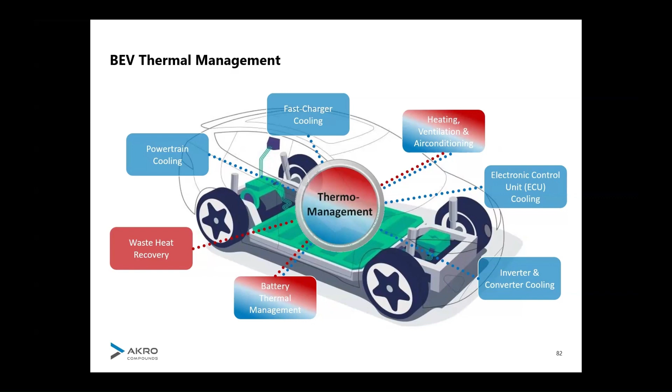You must control the temperature in your fast charging unit. You must control so many different converters, inverters, and on top of that you also have heating, ventilation, and air conditioning. So you see immediately that there are many jobs to be done.

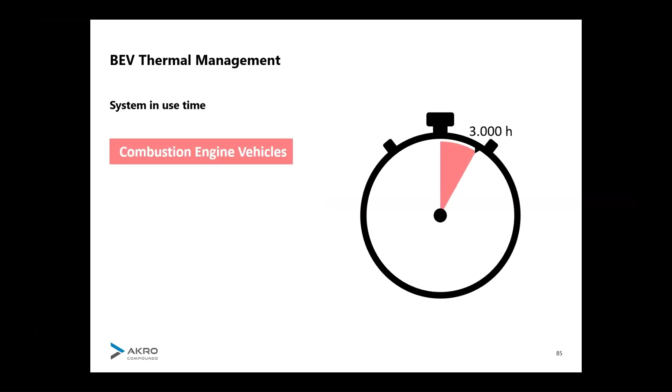The system in-use time in a battery electric vehicle is much different from combustion. In combustion engines, we test for 3,000 hours. Now if you look into battery electric vehicles, 15,000 would be nice, they go even to 30,000, which is already 10 times the in-use time compared to a combustion engine. And we already have customers asking for even more, 45,000 hours, 15 times the time of a combustion engine. So that makes it necessary that you use really the right material.

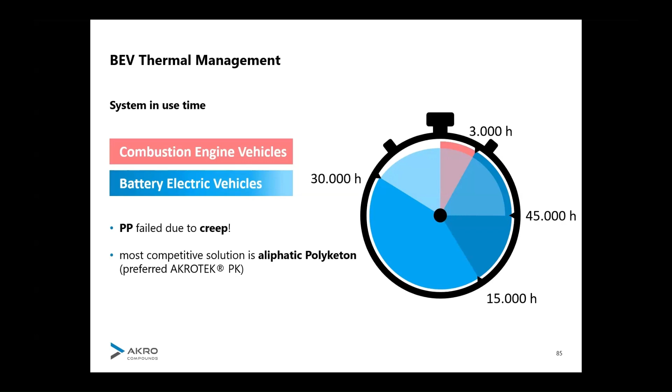Some say polypropylene creeps a lot, and there are reinforced polypropylene types, but after such a long time there is creep, that's just the nature of the polymer. It's hot oil, so therefore we see more expensive grades like PPA or PPS being used.

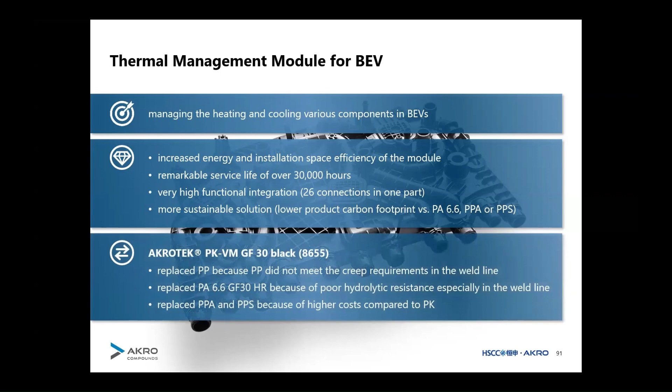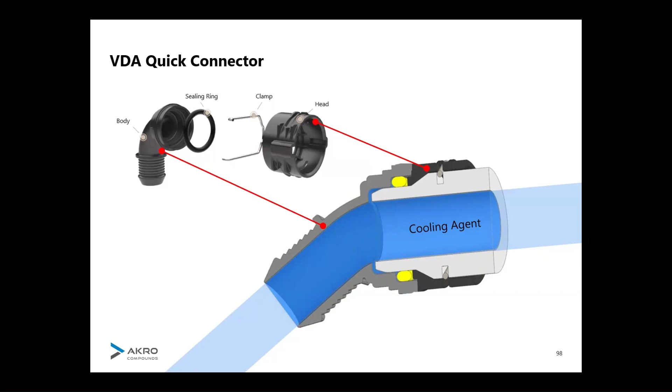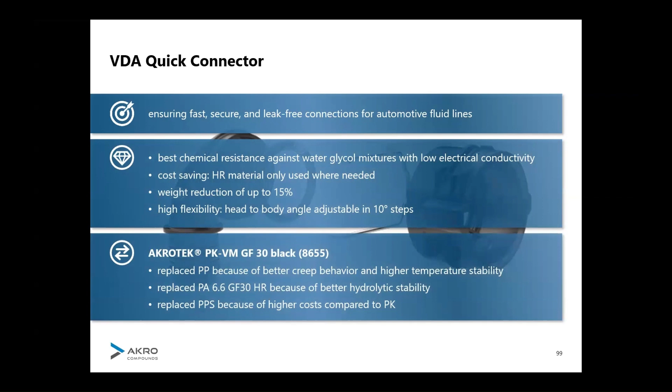We have combined it with a sealing ring and with a clamp. In the end, you can really focus on mechanics and toughness in this area, on price, and also with our PK VM GF30 Black, many applications in all different areas.

The reasons why polyketone is used have already been mentioned. In that specific case, it's heavy-duty caster wheels. Caster wheels have been made with nylon 6 for decades, and it's the standard material widely used. We had a customer, a family-owned, smaller privately held business acting as an OEM. They do their own development, manufacturing, and selling, and they sell globally. They are one of the market leaders, and they had an issue with their heavy-duty caster wheels with nylon 6. So we had a chance to test polyketone against it in the same tool.

We supported them for several days with molding trials, and we could speed up the cycle time by 50%, which is a huge step, and I will explain later a bit why this is possible.

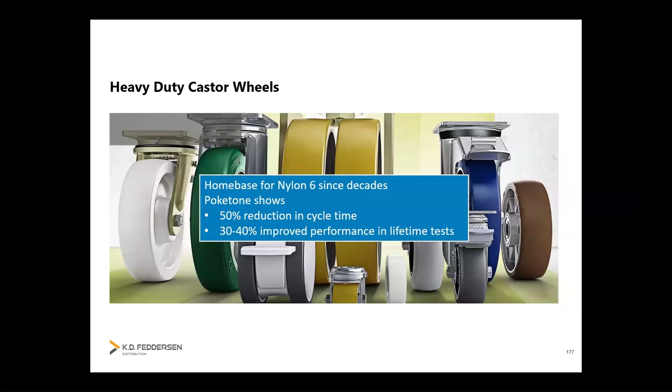So now they are stepping in for that heavy-duty caster wheel application and replacing it with polyketone, and this application will be multiplied.

We've already seen it, that is some kind of number one application in the automotive industry - high voltage connectors for e-mobility. Typically the materials used are nylon-based, so nylon 6,6, some PBT, also some PPA materials are used, as well as polyketone. Standard material is glass fiber 30 with a flame retardant system that enables reaching V0, plus orange color, which is needed to make it optically clear that this is a high voltage application.

Typically when material ages over time with heat, parts break due to brittleness. And here you have a huge safety margin in terms of long-term application as well as for all the clips - twice as much as every other material.

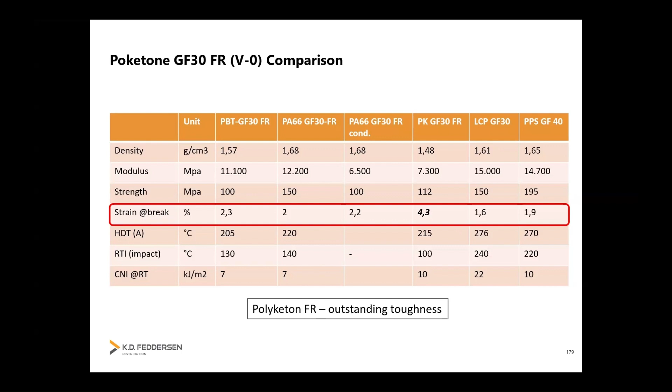For fiber trays, this is a big topic in Germany as we're building our glass fiber network for internet to get a broader range. The part we're talking about is this flap here. Many are put into that device, and the whole network is then used to distribute that within buildings or communities, so it's a highly complex application.

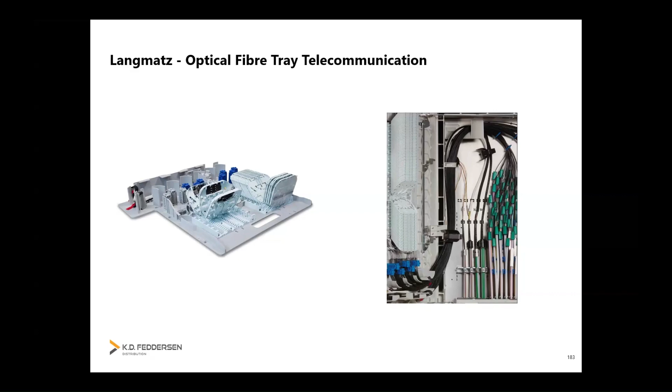In total, the whole assembly uses an unfilled polyketone with flame retardancy rating V0. It's a custom color, mass colored, a special white for that customer. And the combination is PFAS-free and halogen-free.

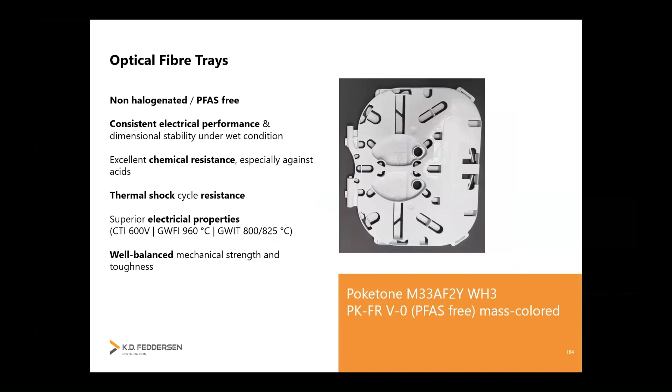The customer was previously using predominantly ABS material for this fiber tray, but with the new requirements for that application, ABS didn't make it. So we had a chance to discuss with him and introduce polyketone, which was not known to him. We supported the molding trials and could speed up the cycle time by 50%. This is a thin wall part, just 1 millimeter.

And the caster wheels, for example, were thick wall parts where we're talking about cycle times of minutes, since the parts are several centimeters thick.

For the customer, it was the combination of mechanical performance, with a lot of toughness still left over. So with that combination, unfilled, you have 40% elongation at break with the material still rated V0. That was one point for the material.

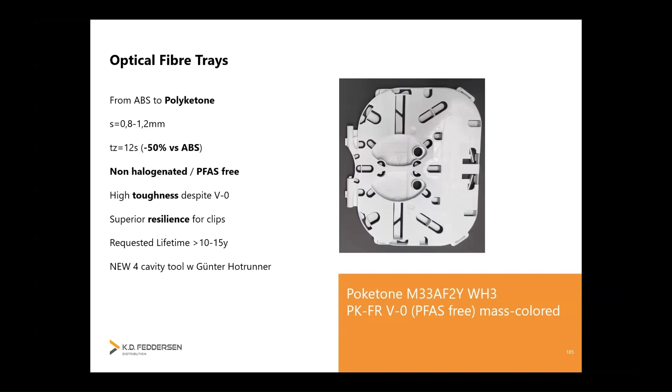They've done their extensive testing, and now they are scaling up and building a new four-cavity tool, to my knowledge. What I heard, they should be in contact with you. As far as I heard, they're switching to a full hot runner system.

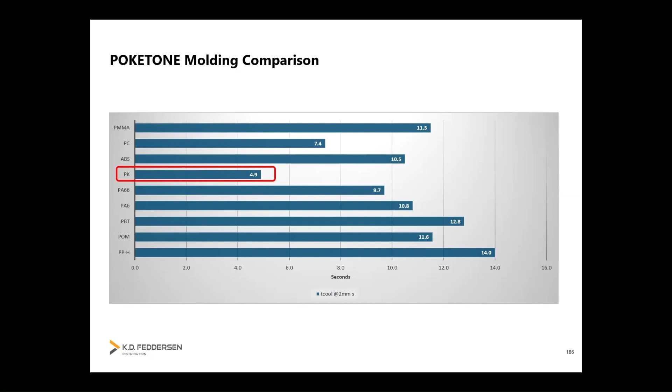There are two reasons for that. One is the thermal aspect, that the heat transfer is quite quick. The other is that the speed of crystallization of the material is exceptionally fast. That makes it a really super fast cycling material, which adds, besides the performance and properties of the material, a big step in economical benefits the customer can get. But this needs to be supported in the molding trials to really squeeze out what's possible. We've proven several times that we can speed up the cycle time.

A typical module made of POM would last 2 to 3 months, with cut resistance and drop impact potentially causing replacement. Now that peracetic acid was being used, some of these modules were breaking in as little as 2 weeks, increasing manufacturing cost, downtime, and creating a new concern with polymer fragments mixing with the meat because they were breaking so regularly. This is where we got involved with our customer.

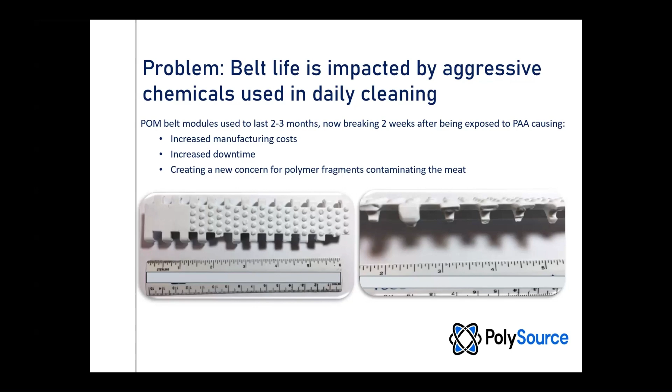They brought the problem to us and said we need some help. Through the design funnel we started looking at it, really at the chemistry behind the problem they brought to us with peracetic acid. We can see how it readily breaks down the carbon-oxygen bonds in POM, but has no effect on POK.

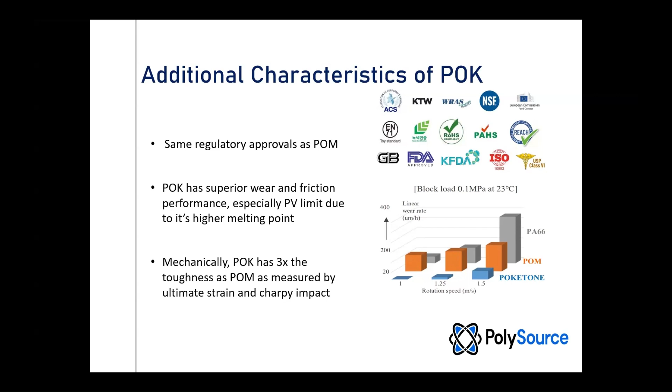Continuing through the design funnel, POK has great regulatory approvals, so we didn't have a concern there. It meets all the FDA and other countries' food contact requirements. We did some studies to show that POK has superior wear and friction performance, and as you can see here, we definitely improved the wear resistance at different rotational speeds that the customer would need. Mechanically, as mentioned earlier, POK has 3 times the toughness of POM, so it really looked to be a good candidate for next steps.

So we did just that. We went to our customer and sampled with them. Parts came out looking great. Dimensional requirements such as pitch and length are very important as these fit together, and we were able to meet those without needing any mold modifications due to its similar shrink rate. And then, of course, the resistance to the sanitizer appeared to be good.

So it was good to move forward. The next logical step was to get this belt into production to see how it would perform. As mentioned, POM was lasting about 2 weeks, so we started calling around that time frame to see how it was going. Things were great—weeks turned into months. Finally, at the 9-month mark, the customer couldn't believe how well it was performing and decided to take it offline and replace it, just because they thought for sure it was going to break eventually. It did not.

We also had some unexpected benefits of polyketone. Cleaning happens every day, and with the POM, protein residue would stick to the belt. That led to a little bit more elbow grease needed to clean these belts, and as you can see, they were losing products.

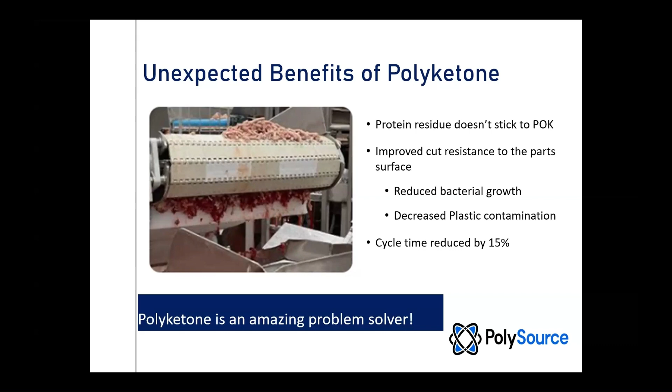The target is simple but critical: to ensure absolute rear side stability for safe enclosure design. The pass-fail conditions are strict: any hole, any burn-through, or any ignition on the rear side means failure. So let me show you the demonstration video of it.

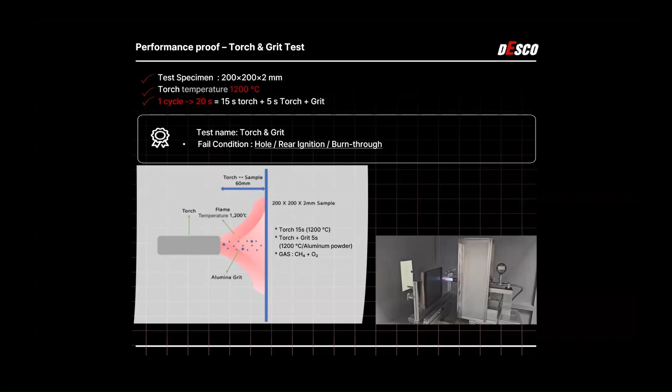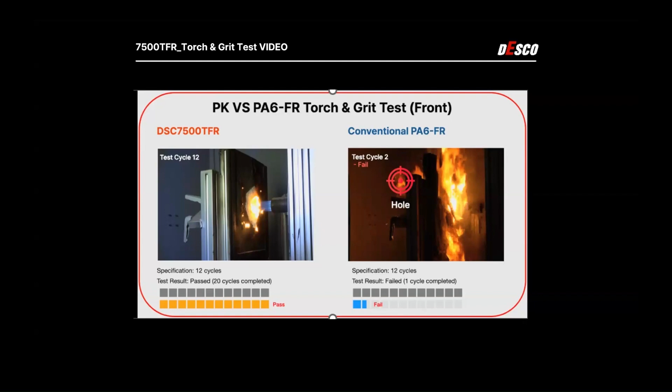Now I'm going to show you a video of the torch and grit test featuring our 7500 TFR grade. To give you a clear comparison, the video will show two materials side by side. On the left is our TFR grade, and on the right side is a standard flame retardant material, a polyamide 6 with 30% glass fiber rated to V0. Both specimens are 2 millimeter thick, tested at 1,200 degrees Celsius, with the flame 60 millimeter back between the specimens and the torch. Let's watch how it works.

Here is the demonstration video. I'm going to skip the introduction about our grade.

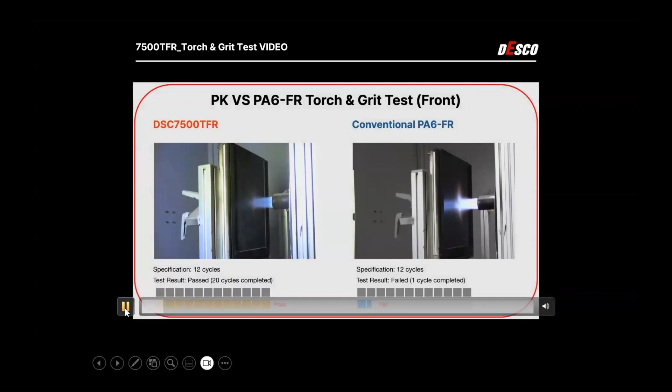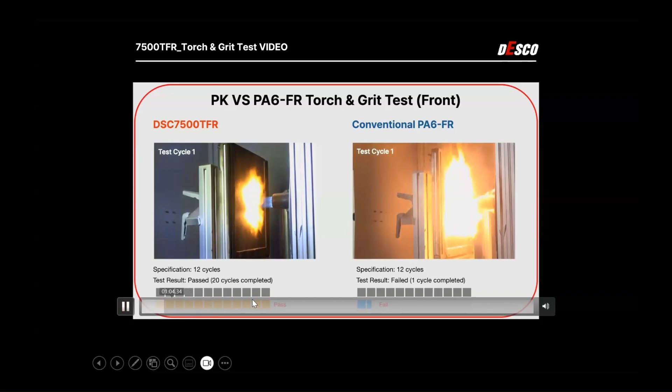Just to make sure, this is our TFR grade, and this is the nylon 6 flame retardant grade. Here is our specimen, 2 millimeter thick, with a distance of 60 millimeter from the torch. For 15 seconds there's only flame, and for 5 seconds there's flame and grit. That's one cycle, and let's see how long they endure this test. This is one cycle.

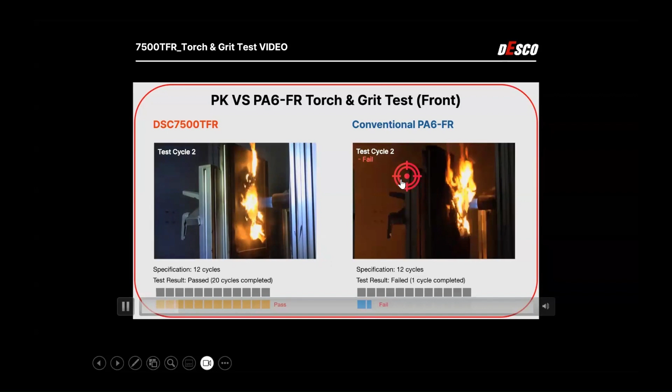After 15 seconds, there is aluminum grit applied. Now it's cycle 2, repeating the 15 seconds and 5 seconds section. As you can see, the nylon 6 flame retardant grade already had a hole during cycle 2, so we stopped it. But this is the polyketone grade, TFR grade.

Now it's cycle 3. Let me skip ahead to show how long it endured this test. So it's cycle 5, 6, 8, 9, 11, 13, 15, 17 — this is a kind of char layer of polyketone. Cycle 19 and 20 — even at cycle 20, there's no hole or flame on the backside.

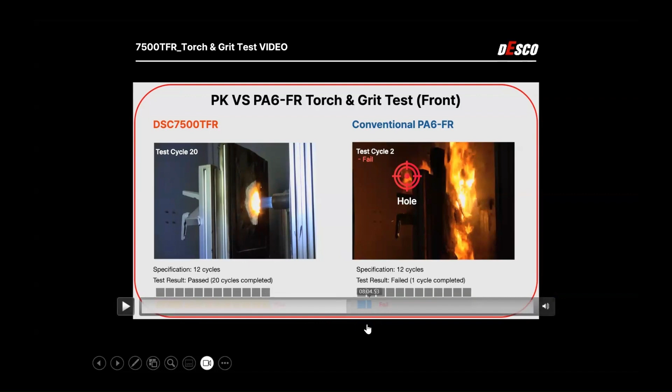Let me show you the backside of this specimen. Here is the backside of it. Yes, flame is over here, and here is the backside of the specimen.

This is during cycle 1 — no hole at all. Let me show you cycle 2 to show the hole here. Now it has a hole, with flame on the backside. That means this grade has failed — this is the polyketone TFR grade comparison.

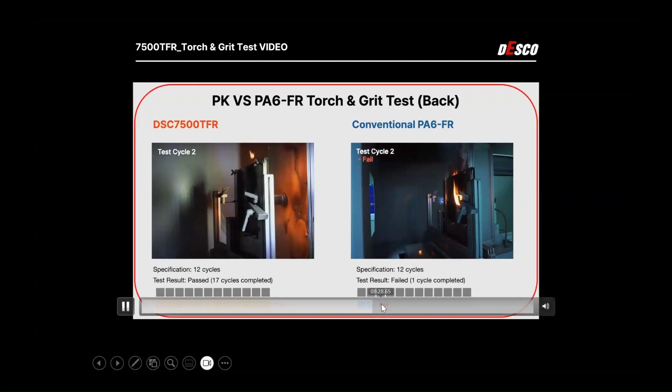Let me skip to cycle 4, 6, 8, 10, 13. There are still flames on the grit side, but no flame or core at all on the backside. Until cycle 20, there is no hole.

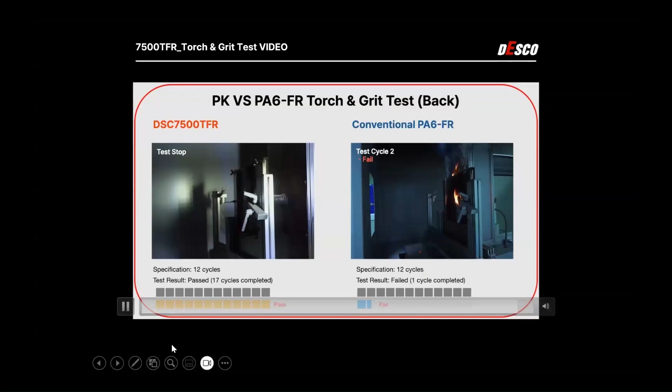Let me show you the result of the test. Can you switch to it? Yes.

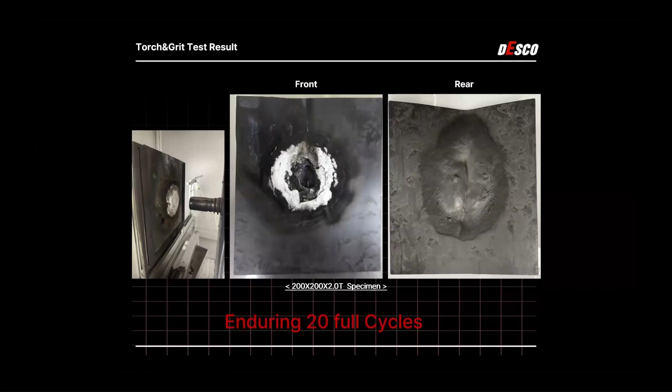This is the still image from our torch and grit evaluation. The specimen on the left is the front, polyketone. Then we are telling two stories.

One story is about engineering commodity resin, which is the PA6 material, versus super engineered plastic material. First, if the material has problems or big troubles, then we are a solution provider. And since super engineered plastic is sometimes too expensive with over-engineering factors, we give customers a reasonable price with moderate performance, so customers can optimize the engineering factors and reduce cost.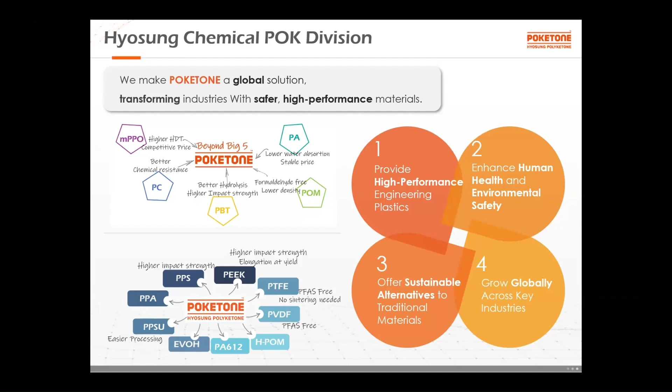What about polyketone? So first, polyketone density is 1.24, PBT 1.30, POM 1.41, nylon is 1.14. So its position is here.

Tensile strength, polyketone is around 58 to 60 megapascal. So something softer than POM. And elongation at yield, polyketone is more than 200%, very high.

Hardness looks soft, versus heat deflection temperature which is very similar with nylon 66, and toughness similar with polycarbonate. Polyketone is tough and high impact, competitive with engineering resins so much.

In the bottom table here, we can see two points: one is impact strength, and the other is changing properties of nylon. Polyketone as an unfilled base resin is 15 kilojoules per meter squared, versus nylon 4 to 5, PBT 5, POM 6. So it's 3 times higher as an unfilled base resin.

Nylon is a very good material, but it absorbs water and changes a lot. So as dry, 17, 19, but after wet, 360, 370. But polyketone is 200%, always stable.

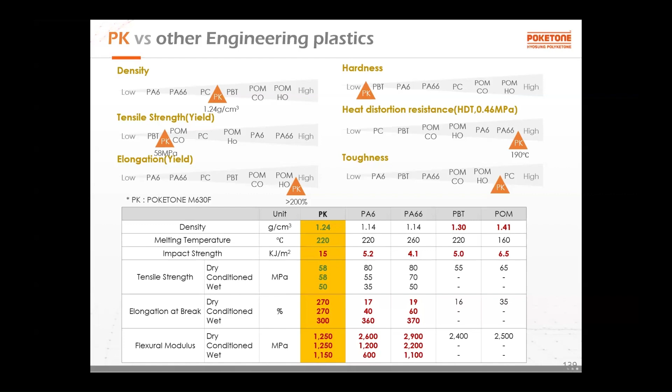And flexural modulus, unfilled base resin around 1250 megapascal. Nylon starts at 2600 in dry, but drops in wet to 600. Very much change. That's why we are telling you polyketone is here, and if you have a problem, then we can give you the solution.

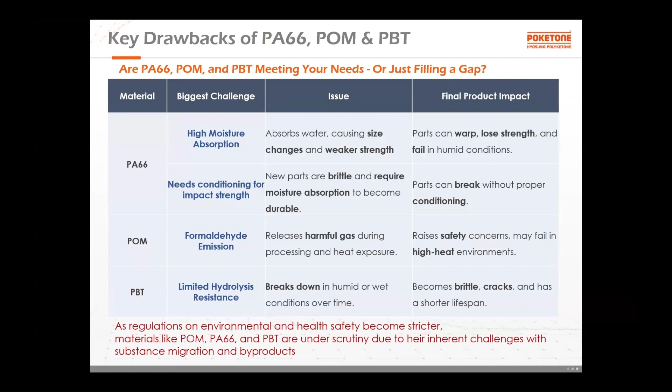So as a summary, nylon has high moisture absorption and needs conditioning for impact strength. POM has formaldehyde emission plus low acid chemical resistance which is not so good. And PBT has limited hydrolysis resistance. Polyketone delivers 9 points of performance: chemical resistance, barrier property, impact, water resistance, heat resistance, HDT, and tooth and gear friction, resilience, spring back, toughness, abrasion resistance, safety, non-toxic, and NVH performance.

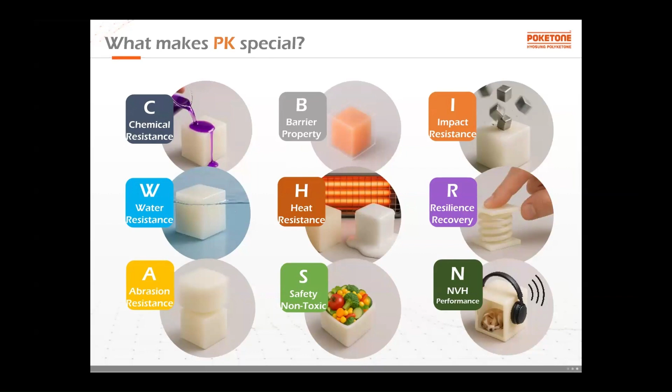Last year, our mix sales performance by items. Number one was automotive parts, for connectors, electric vehicle components, and also cooling module systems.

Food conveyor belts, that is excellent for polyketone, replacing both homopolymer and copolymer. And toy parts, cosmetic packaging and pumps, water purifier feeding, industrial roller casters, fuel, and lastly, oil and gas pumping components and pipes. That's a view about polyketone.

Polyketone can be categorized based on melt flow index and melt temperature. Our main grade has a melt temperature around 220. And we have 5 grades, from low viscosity M130 to high viscosity M730.

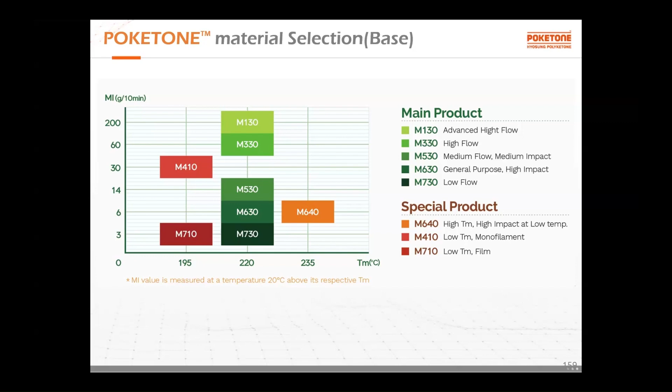This is the compound grades we have right now: glass filled material, flame retardant material, lubricant material, and flexible tube application. In case of glass fiber reinforced material, the polyketone can be reinforced with up to 50% glass fiber.

And we also have a new EU directive grade for water applications. We also have improved processing grades, M33AG6A-NP2.

Also, recently we got a lot of requests for flame retardant grades for applications like electric vehicles, so we have a portfolio of flame retardant grades across various thicknesses.

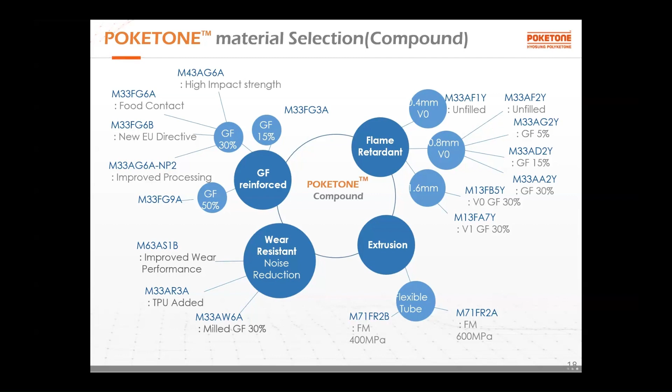We also have a wear resistance grade. Naturally, polyketone has good wear resistance, so by adding silicone, TPU, or milled GF, we can further improve our wear resistance potential.

Current level is around 3.1 - it means that 3.1 kg of CO2 is emitted when we make 1 kg of our polyketone. In case of PA66 and PA6, it's 6.4 and 6.7, double. So it's a very good advantage to use polyketone to reduce global carbon footprint.

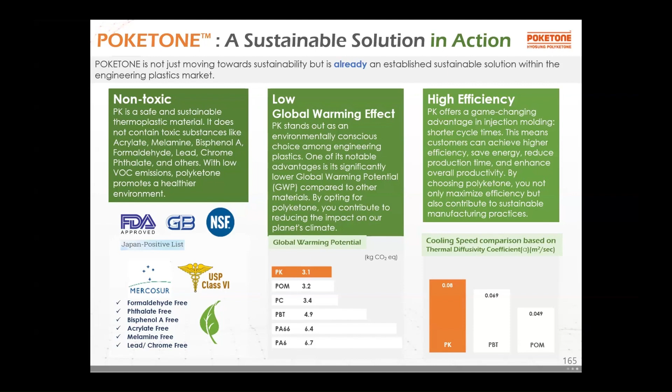Another thing is that polyketone has a higher thermal diffusivity coefficient, so as I talked to you before, you can reduce the total cycle time.

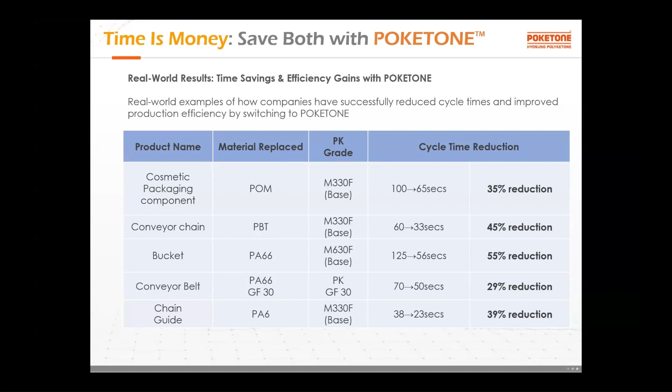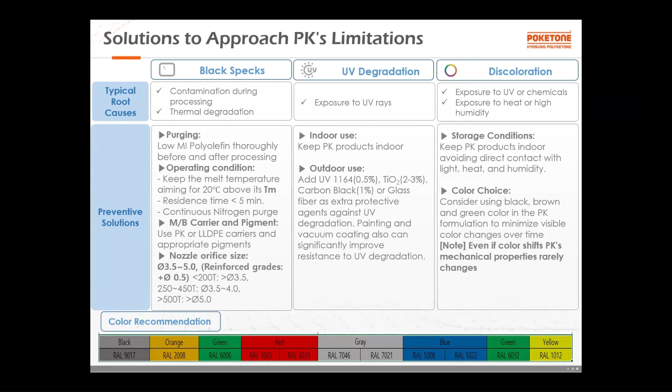But recently we are focusing on other colors, so we are now testing with AF color in Germany and some master batch companies in Korea. We are now doing the test at 85 degrees C and 85% relative humidity.